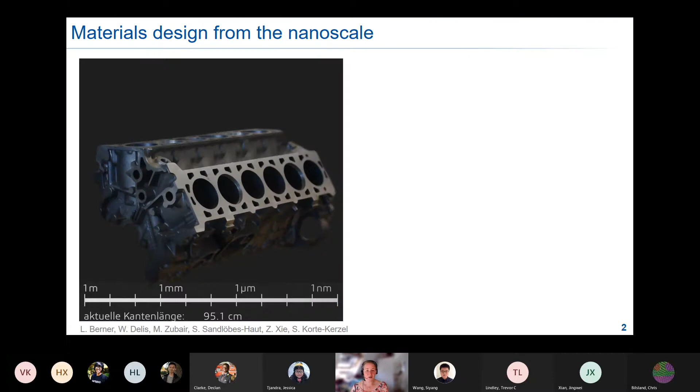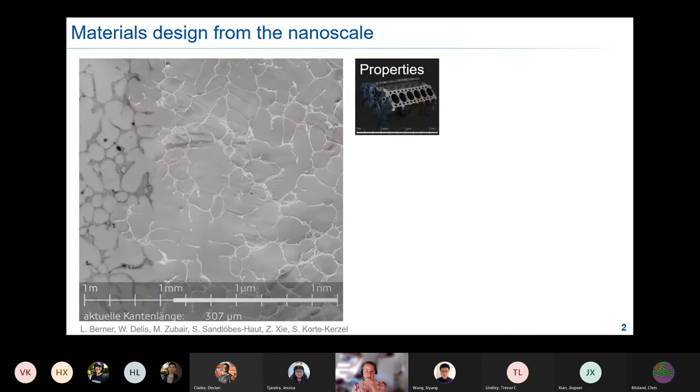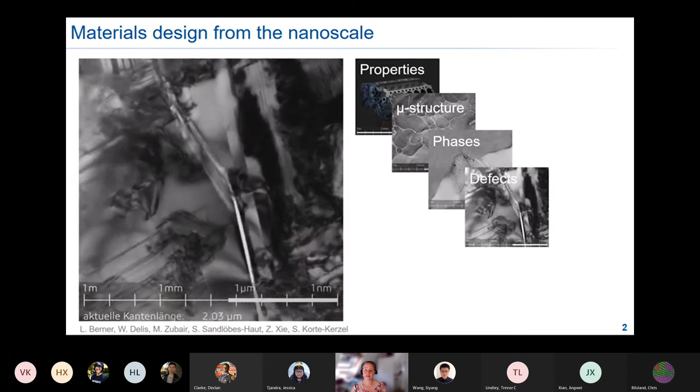Okay, so just to start us off, I think we all kind of do the same thing normally when we think about materials. We always have some property that we want to think about, and that can be at the macroscopic scale. And then as materials physicists, scientists, we normally go and say, well, that actually originates from the microstructure. We can interrogate individual phases, how they deform, and which crystal defects actually give rise to their properties, how they're affected by alloying, and we can do that all the way to the atomic scale these days.

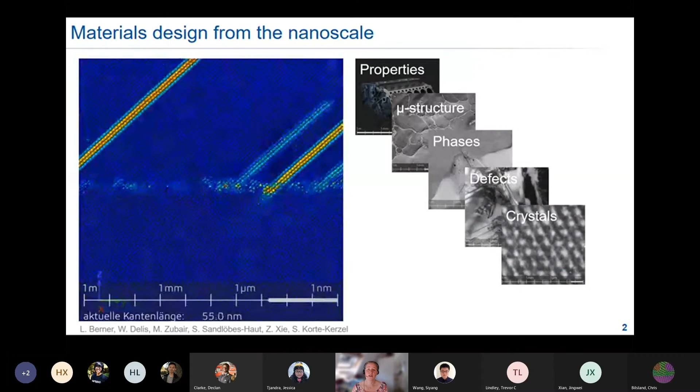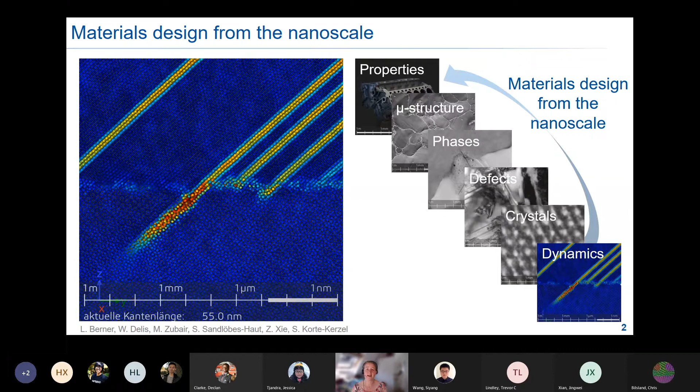We can do that in the experiment, but importantly, I think now we can also go back in scale and use the same scales to not just look at something that's maybe most of the time stationary in the microscope, but to actually look at dynamics using, for example, atomistic simulations. So what we do a lot of the time in our research is combine the scales, we try and design materials from the nanoscale, but also from the microstructural scale. And these are all the length scales I want to just dip into briefly and give you an overview of what we do there.

At the macroscopic scale or the microstructural scale, there's a problem we wanted to address: most of the time you have very heterogeneous alloys. High performance alloys are intrinsically heterogeneous, and what we always get is that we get high resolution, but then we're missing the statistics, and that's something we've tried to address using convolutional neural networks.

I'd also want to go down a little bit in scale and tell you briefly how we try starting to think about thermodynamics of lattice defects, so not just their structure, but also their thermodynamics. And I'd like to start on the smallest scale, thinking about crystal building blocks, which new materials we might actually find if we think about more complex crystals as well. So we start from the bottom, the smallest scale, and then work ourselves up. This is actually funded by the European Research Council as part of the starting grant FunBlocks.

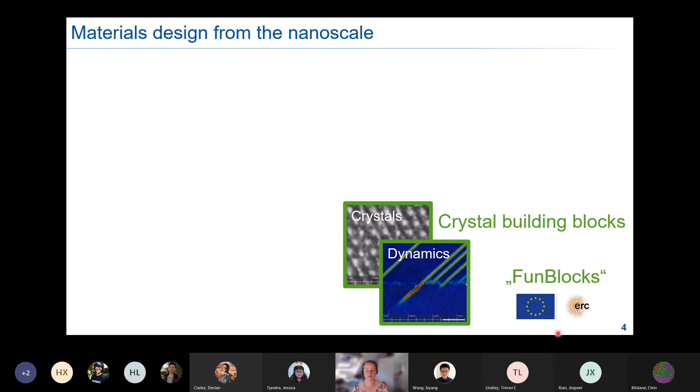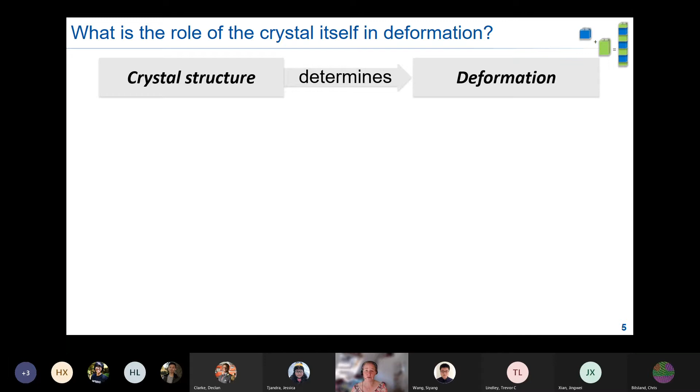So the first thing to think about, it depends, I don't know what everyone's background is, so I thought I'd start out with this. What's the role of the crystal itself in deformation? And I think it's actually the most essential role. The crystal structure determines deformation. It actually determines how, in general, a material deforms, whether it's intrinsically hard and brittle or whether it's ductile.

And just to show you briefly that it is actually the crystal structure and not so much the elastic modulus or the bonding itself: if you compare two materials with a very similar shear modulus, like silicon and copper, their intrinsic strength, so not after alloying and all of these things, differs by about 4 orders of magnitude. And the reason for that is that if a dislocation wants to move through the lattice, it has to overcome the resistance of the lattice.

And that depends actually exponentially on the distance between the slip planes over the Burgers vector, so the jump distance of a dislocation. The bonding, the shear modulus, goes in as well, of course, but it goes in linearly, so it's not as strong an effect on the absolute stress that we are measuring in a material.

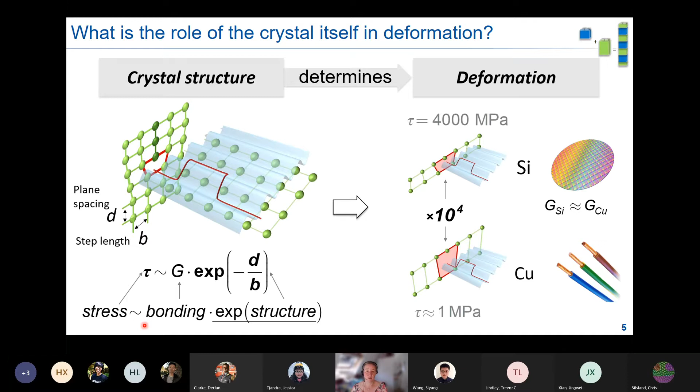So what does that mean? Once I know this, that I have the slip plane spacing and the Burgers vector, you might think it's easy, right? I want to select my material based on maybe wanting something fairly strong so I can operate it at high temperature and still have remaining strength. I just go into a database and look at this, and then I find something where I can maybe increase toughness by lowering the strength a bit.

You're looking for something that's appreciably tough, but still strong. And a lot of the materials, actually most materials, are not an aluminium alloy or a titanium alloy or something of the sort, a pure metal that's been alloyed. Most materials in a database will actually be binary, ternary, and so on crystals.

And all of these tend to form much more complex crystal structures than just an FCC or a BCC lattice, or they have larger motifs that go on these lattices. So what we want to do is we want to be able to go and look at these structures and predict what their deformation characteristic might be.

And for that, we need to understand the mechanism so that we can then predict stresses based on the crystal structure. There are difficulties, and the main one is that you have to know the slip system to do the analysis I just showed you. If you want to measure the distance between two slip planes, you have to know which plane that is, and you have to know which Burgers vector a dislocation might have. And that's something that for most intermetallics, for example, we simply don't know.

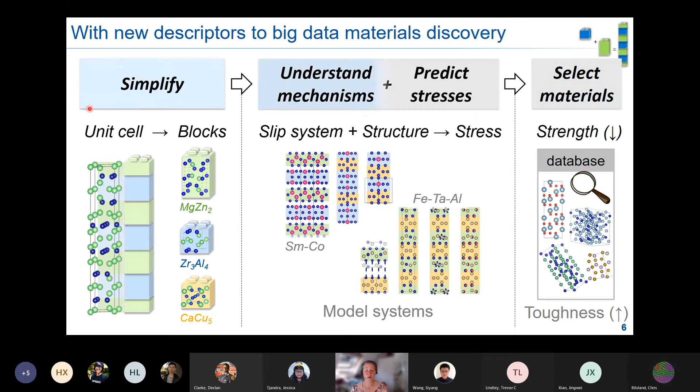So this is where we're at the moment, simplifying and understanding mechanisms. And I just want to show you a little bit of where we actually are with this.

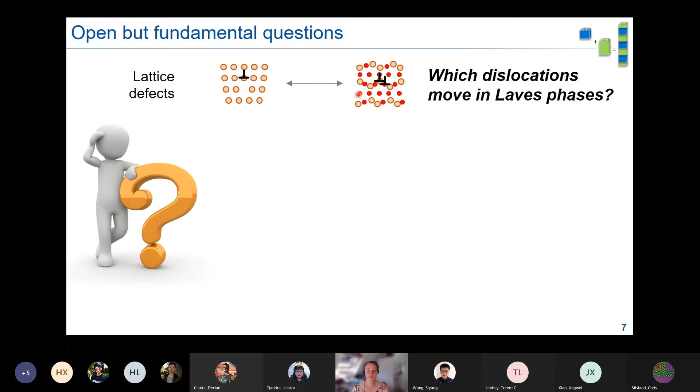So in undergraduate teaching, we draw edge dislocations, right? We draw them into a primitive cubic lattice most of the time. We also think about FCC and BCC crystals. But if we look, for example, in Laves phases, that's the crystal shown here in one projection, they're the most common intermetallic packing as a common phase, but we don't even know how to draw a dislocation in there. It's very difficult to even think about how to draw an extra half plane into this. So that's where we started out at it.

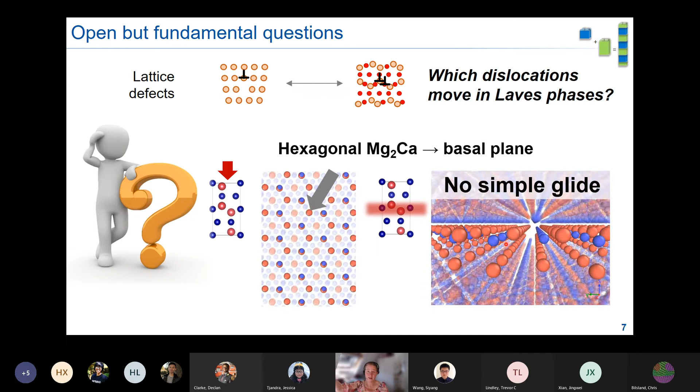There's one example, the hexagonal Laves phase, Mg2Ca. And if you look into the basal plane of this, and you can do some atomistic simulations, because for this we actually have potentials, then we can look along the plane, and we can look from the top, and we then try to shear the crystal lattice. It actually looks all right, right? You think, yeah, you shear like this, and then you get a stacking fault, and that's probably a good candidate for deformation. However, if you look from the side, then you can see that that's probably not going to happen, because essentially the slip plane has to take off and be moved upwards by a long distance.

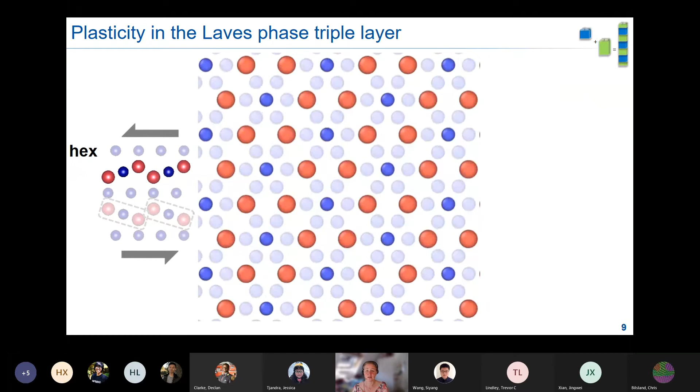And so when we actually relaxed these simulations further and looked for the minimum energy path, then what you get is this. And you saw there was some jumping about, so I'm just going to tell you this in a bit more detail. What actually happens here is that you get a shift in one direction, and then, as you saw before, atoms collide, right?

There are atoms here in this triple layer that are nearly at the same height. What happens is you get a sideways movement of one plane in this lattice, and the whole shear movement continues to arrive at a stacking fault. This whole process is called synchroshear, and that's what's happening in this simulation.

There are a few difficulties with this. All of a sudden, slip is no longer happening in one single plane. It's two adjacent planes, and the atoms also move in two different directions. So the normal kind of modeling strategies we use, like a gamma surface, kind of go out the window in terms of understanding these.

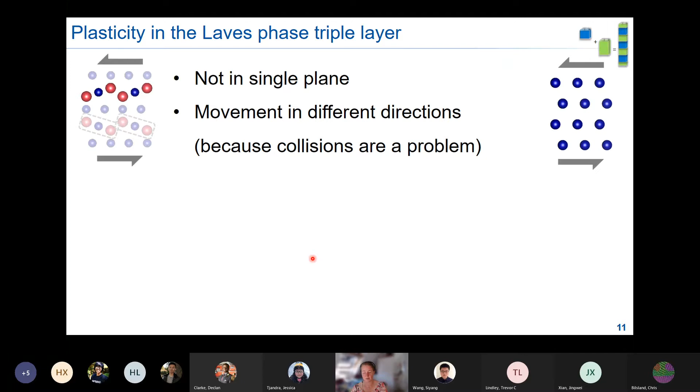I think we have a problem here that's a little bit like comparing soccer to Quidditch. All of a sudden, you're not thinking about one ball and a 2D problem. You have a 3D problem, with collisions and all sorts of atoms actually in the game.

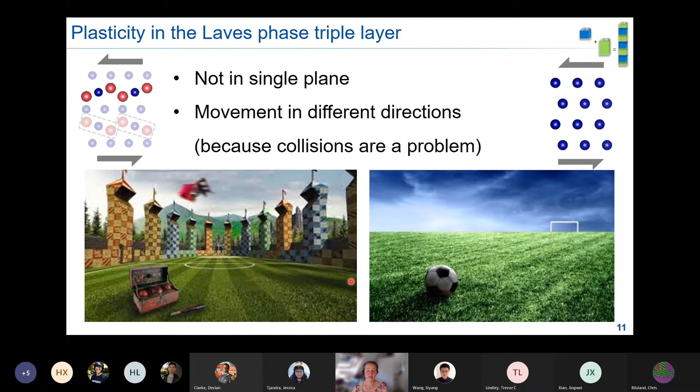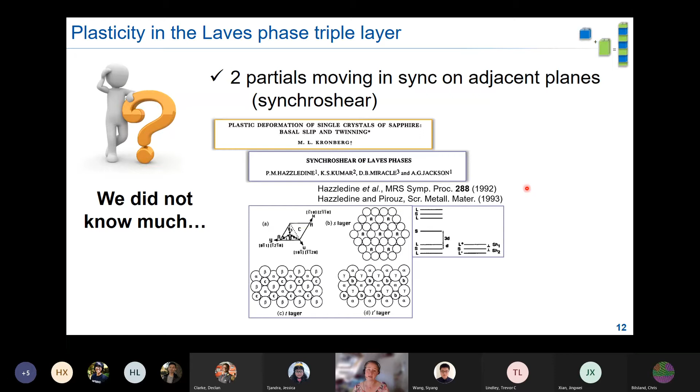We didn't come up with this process. It had been known or suggested quite a while ago. It's called synchroshear, and it was first suggested for sapphire. Then in the 90s, it was suggested this might happen in these Laves phases on the basal plane as well. The problem was that until maybe 16 years ago, nobody had actually seen it. In 2005, there was a science paper that essentially just looked at a dislocation and showed the stacking fault consistent with this mechanism.

But of course, that's a stationary defect. It wasn't even necessarily put in by deformation. What's changed over the last few years, and why I think we can now finally try to understand crystal plasticity in these phases, is that we now have experiments that can actually look at this in a quantitative manner.

We can suppress cracking in small volumes using micropillar compression, and by that we can get deformation. Importantly, we can also pull out samples that we can meaningfully put into the TEM and analyze all the way to high resolution imaging, where we can find out which dislocations were actually active in our material. So we can measure critical stresses and see which mobile defects we have.

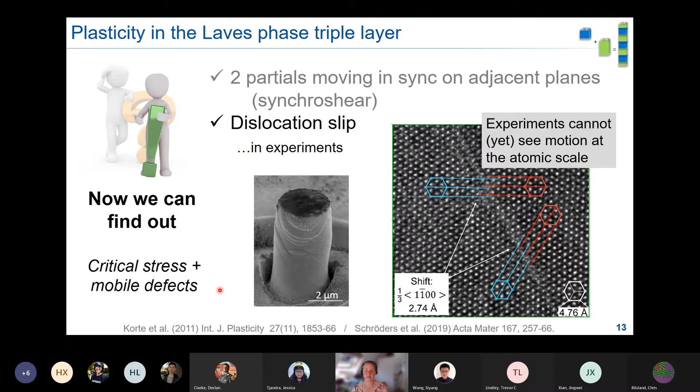The problem is experiments, at least at this kind of scale, as far as I know, can't really see motion at the atomic scale. You can't really see a dislocation moving. But we can now go to the same scale and actually do that in an atomistic simulation, looking at a nanopillar to see how dislocations move through these materials.

We can look at them from the side and do the same analysis we would do in the transmission electron microscope in high resolution TEM. That means we can find out how these dislocations might move. What's most important to me is we can find the critical configurations where we can then be more flexible, do DFT, and compare different crystal structures.

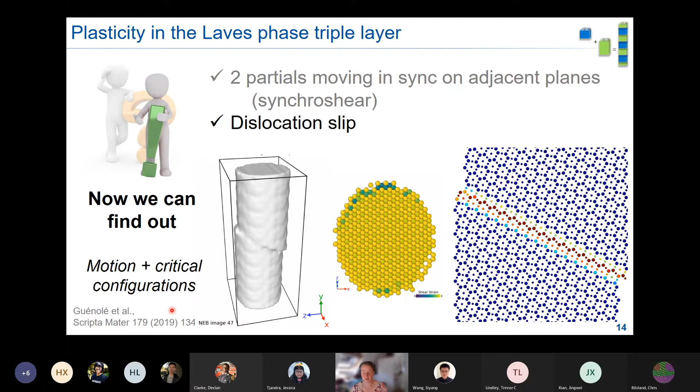One of the difficulties we had was that if we want to look at dislocations in a volume we've deformed in the computer, the normal visualization strategies we use for example in HCP or FCC crystals don't work. They're not geared for these kinds of structures.

So we spent quite a bit of time developing tools so we can highlight where a dislocation is, separate the different but closely related structures, and analyze the Burgers vectors and defects we have. If any of you are interested in this kind of problem, this has just been published, and the code is open at Zenodo and should work in Ovito, for example.

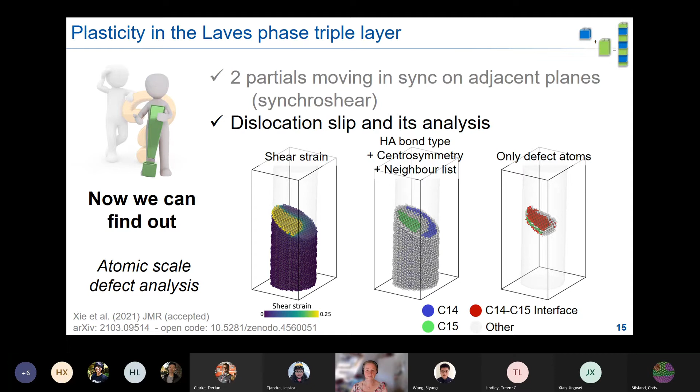Once we have this, we can do quantitative analysis on individual slip systems. We need to get faster. One of the things we're doing to see which slip systems are actually active, even though we have some candidates maybe,

is we use indentation coupled with EBSD so we can look at slip traces at the surface. They're not unique solutions, but at least they give us some statistics and guide us where to do micropillar compression or where to look at atomistic simulations, for example in non-basal mechanisms.

So for us, that's actually been quite nice the last few years. I know at Imperial you use the very same methods. We can combine experimental and computational nanomechanics, and I think getting critical stresses and defect structure from experiment and combining them with dislocation motion and energy barriers from computation is going to be really useful in understanding more about different crystal structures or alloys we want to develop.

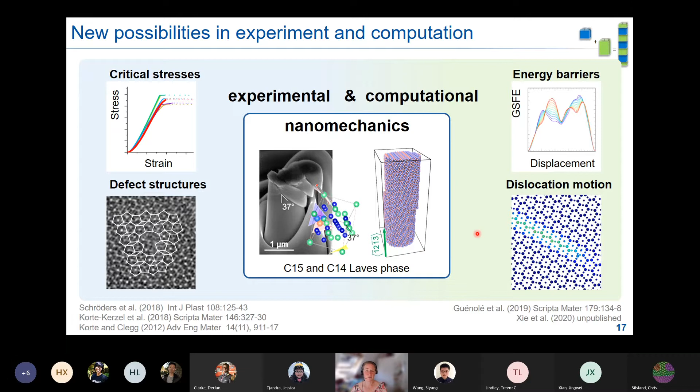So that's the kind of summary of what we're up to in this area. I believe we need new materials, for high temperature applications. We might want to combine properties, even improve damage resistance and functional materials. To do that, we need materials which combine strength, toughness, and maybe some chemical stability.

There are hundreds of thousands out there in our databases. They're all there. We know a lot of them or have predicted them. I think one thing that's missing is we can't predict the mechanical properties quite yet, or just the modulus.

So this will be our approach for the next two years, to look at these fundamental building blocks and then really try to use that knowledge to predict their properties, so we can then find from a database, and then of course alloy and improve new crystals.

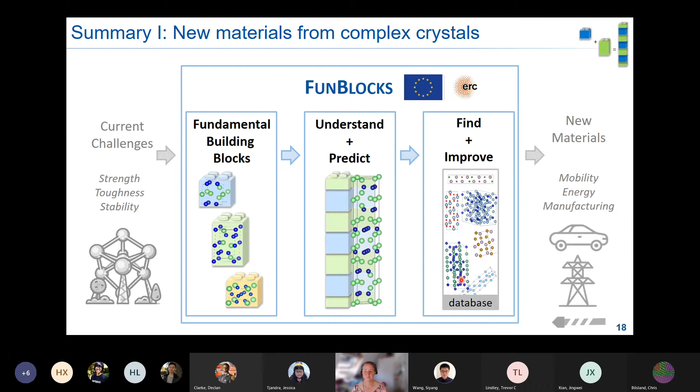Okay, so as I said, I want to give you—because I wasn't asked to speak on a specific topic—just an overview of what we're doing, and I hope that's all right with you.

So this was our work on looking at which crystals we might use for future materials. And then of course we work also on current materials that we use, metallic or intermetallic alloys, where we really want to improve the properties, and where we think normally about defect design, how we can design the defects, which alloying elements we need for this.

And there was one thing that struck us quite a while ago, is that we have two communities. We either think about thermodynamics, and those people are normally the ones who work with phase diagrams and Calphad, designing which phases we have in an alloy.

And then there are the people who look at defects, and they are mostly concerned with doing atom probe tomography on one defect, on a dislocation or grain boundary, seeing where alloying elements go, and then seeing how that correlates with the mechanical properties that we actually get.

It's a large collaborative project funded by the German Research Foundation. We have about 20 PhD students working on this now. So we are embarking on something new here.

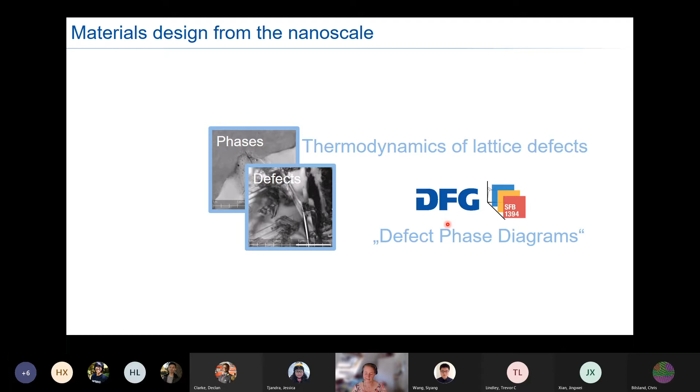I'll also just give you a brief overview of what we think. Maybe there are people in your group as well who work on similar things, and that would be great to combine forces.

So our motivation is that what we want to do is we want to really have guided, tailored materials, do materials design for structural materials like in planes, but also for the structure and mechanics of functional materials.

And we know exactly what to do for this, right? I think everyone who does undergraduate teaching in materials science, or at least attended these lectures, we tell everyone that's what you do.

You look at and understand your lattice defects like dislocations, you perform some alloying, and then you have mechanisms like Cottrell clouds or segregation, at least to defects. They might affect microstructure evolution, and you select the phases and their stability from phase diagrams.

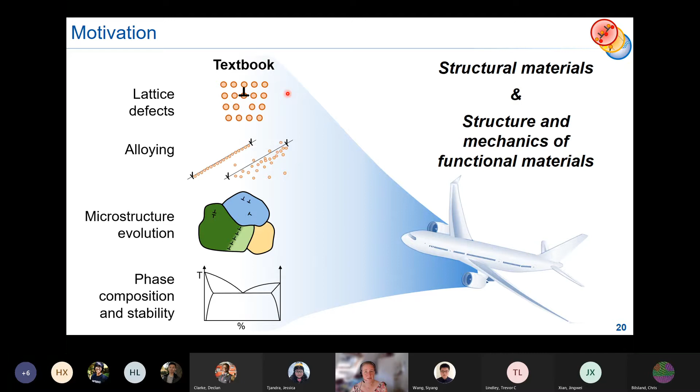That's what we do in textbooks and in teaching, and actually in research we go a lot further, and there are a lot of sites that we work on.

I've already told you that in ordered crystals, even just knowing which defects we have might be a difficulty. We also know, though, that these defects, when they are alloyed, are not just some continuous thing like a Cottrell cloud. Actually, you get chemistry and structure interacting very strongly at the defects.

We call this a defect phase, as you see. You might have heard the word complexion as well—something, a distinct structure that forms at a defect and not anywhere else. And of course, these will affect microstructural processes like grain boundary mobility.

So then you have an effect on microstructure evolution or on plasticity. And the main point that we wanted to look at is, well, actually, we should be able to do that for the defects just the same way as we do that for crystalline phases.

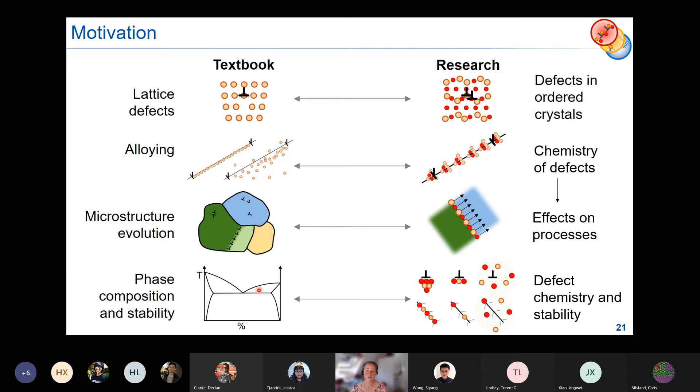So there is a disconnect between those things at the moment. We don't have physical links really between, for example, our structures at a defect and the properties, and we also don't have a coherent framework. Everyone looks at their own material, and we might understand a lot about individual materials, but we don't have a framework where we put in crystalline phases, where we put in alloying, and where we put in how the defects are affected by this.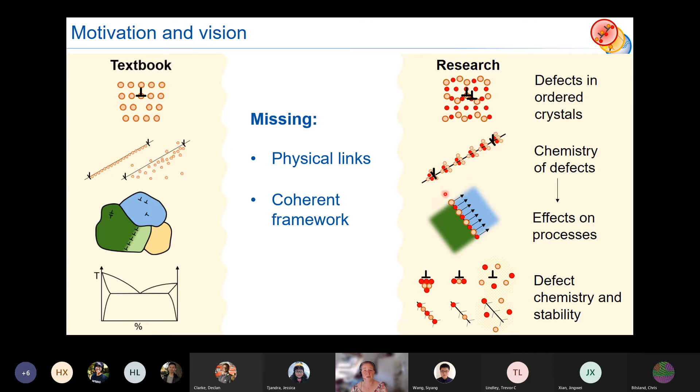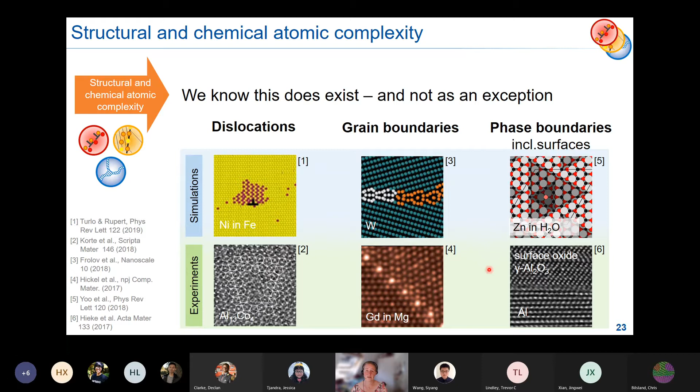So the first thing to think about, maybe a question: does that actually matter? Is that something that happens a lot of the time, or is that just something people have pulled out a few materials and published some nice papers on? Actually, we think that this kind of ordering at defects is not the exception, but it exists in most materials. People have looked at this in simulations and also in experiments - you get ordering locally at the defect, the chemistry changes and then the structure changes as well. There must be driving forces for that to happen. It can be at dislocations, it can be at grain boundaries. You can also have phase boundaries, and that will include surfaces where you find distinct structures coming up. So they also must have a thermodynamic stability that has a driving force for this to happen.

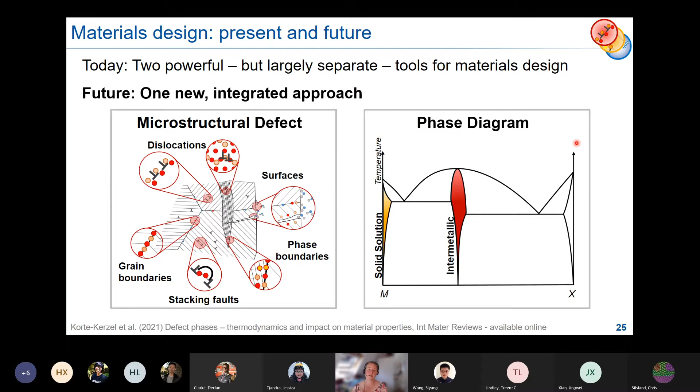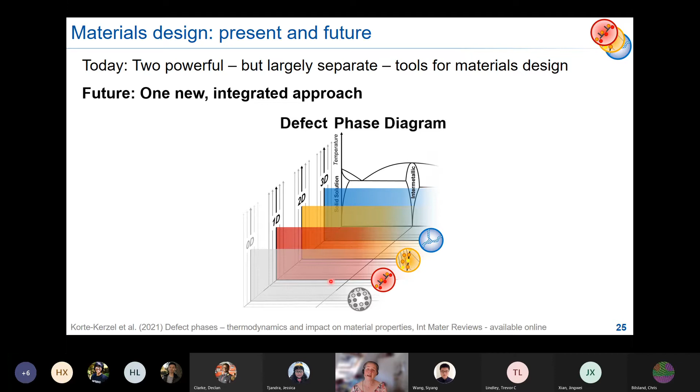So the idea is that what we should be setting out to do is to take these two powerful approaches - thinking about microstructural defects that we tailor and engineer, and the phase diagrams that we look at - and really put them together in one new and integrated approach, so that we have defect phase diagrams and not just phase diagrams. That means we have to do the whole exercise of judging stabilities, comparing different possibilities for defect structures in all dimensions. For example, we have the 3D crystal structure, we also have interfaces at 2D, 1D, we have dislocations, and we also have point defects. We'll try and put all of these into one framework.

So the first thing to get clear here is what we actually understand by a defect phase, so we can put them in something like a defect phase diagram. And we understand by this a structurally and chemically distinct atomic scale configuration at a defect that has a thermodynamic stability - something I can affect by changing the temperature, the chemistry of the alloy, and so forth.

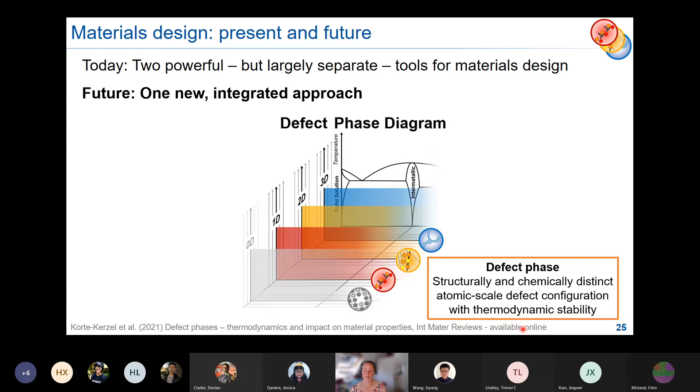How will these actually form? Well, what you will get is something that we know from all other defects. You start with newly created defects and maybe a random distribution of alloy elements depending on how you quenched. Then you have some transient states where the elements will actually segregate to the defect, form the most favorable defect structures. Then you'll probably get some relaxation and formation of defect ensembles, like you get, for example, in recovery. And then at the end of the day, you'll of course not have defects in a kind of long-term thermodynamic consideration - you would have some point defects and two separate crystal structures.

But the important thing is that we have this in our alloys, and our actual design target is somewhere here. We hardly ever go to actual equilibrium in what we use in everyday life. So what we want is - and that's important - local minima that we can stay in for a long enough time.

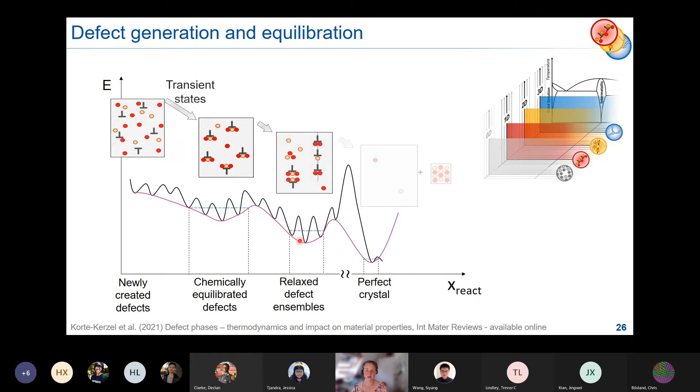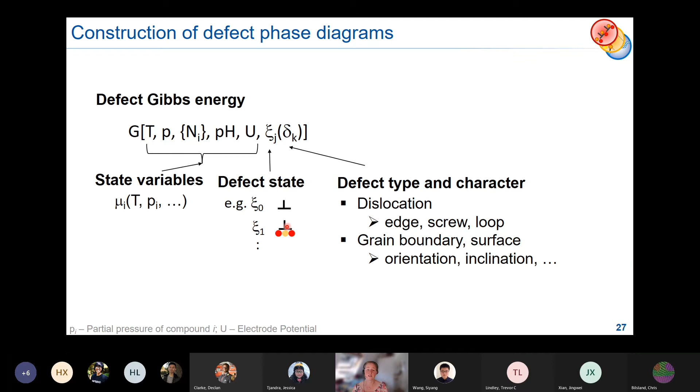So we can then, in theory, go and calculate Gibbs energies for the defects. We'll have state variables like the temperature, the pressure, the defect state. We actually need to think about all the different kinds of defects, for example, edge or screw dislocations, boundary orientation, and so forth. All of these describe the defect phase, and the conditions are essentially described by the chemical potential.

And then we need to think about actually doing this, and this is where the problem comes in. There are now a lot of variables, or a lot of different defects that we need to look at, for two axes - for example, the chemical potential of two alloying elements. So what we think you have to be doing is what you would do in different phase diagrams as well: go and look into your alloy, look at maybe having one defect structure at one point and then having a different defect phase at another point. Then we would have to keep looking at other points and look for the boundaries in our phase diagrams, just like you would do for a normal phase diagram.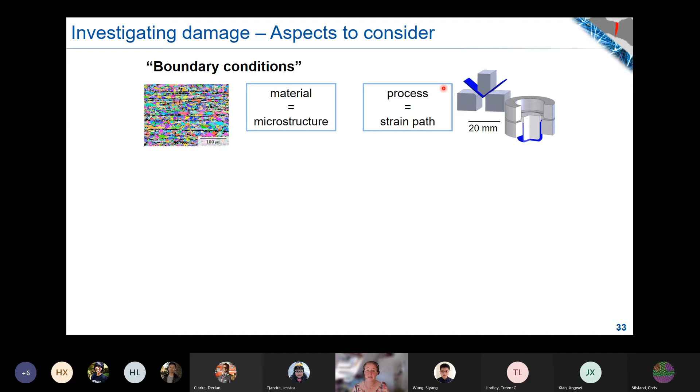The engineers actually think about the process and the strain path that a material encounters. We also think about damage, and we think about nucleation, growth, and coalescence. From the engineer's perspective, that means how far am I from failure? Which safety margins do I have to consider?

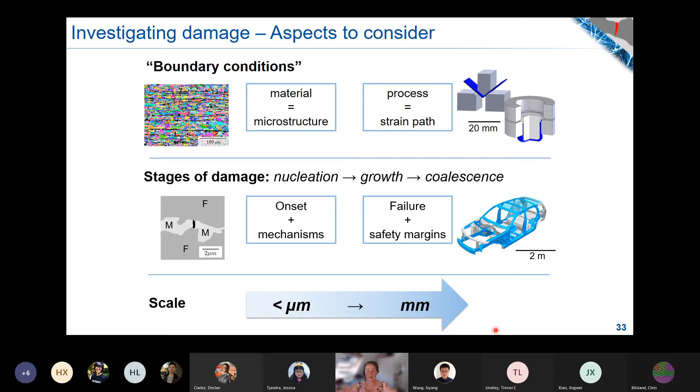For us, we're interested in the underlying mechanisms - where do I actually nucleate the first damage, and by which mechanisms do I do this? The important bit here is that I really have a scale bridging problem. Damage might nucleate at the nanoscale, but I need to cover the inhomogeneities that I have at least over the millimeter scale. That could be the thickness of a sheet, and that can also be the strain field or strain path that varies over a much larger area.

So what I want to do here is show you how we started addressing this problem. The first step was being able to combine high resolution to look at individual mechanisms and individual sites, but do this over large areas so we can look at inhomogeneity and get some statistical relevance.

What we want to analyze is the active damage mechanisms, and we want to learn which ones are dominant and how that might, for example, differ with stress state - whether I bend a sample or whether I pull on it in one direction or biaxially.

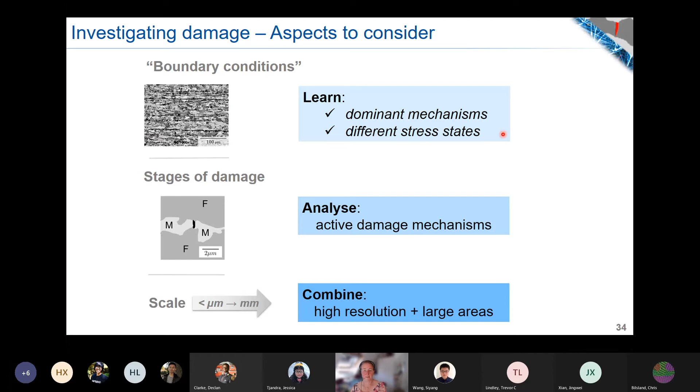The setup we use for this is we look at a tensile test sample, a few millimeters across, and then we set our microscope to take lots of individual images, and at the end of the day we stitch them together in one panoramic image where you can then, at every point, zoom in to about this level of resolution.

This is one of the reasons why, if we just look at one image like this, we fear we might not be representative enough. So we look at panoramic images that are maybe a square millimeter in size.

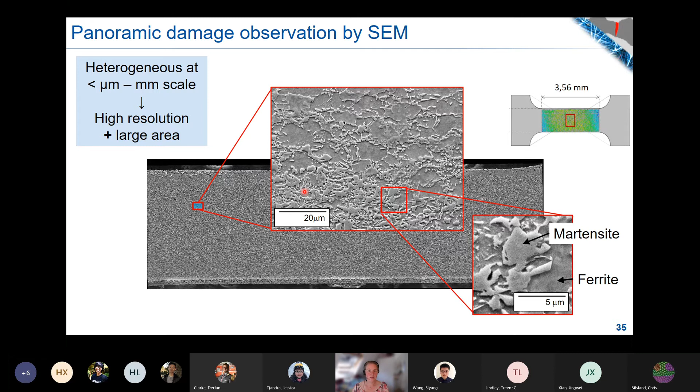What do we do then? We then end up with a lot of image data, and what we really need to do is be able to deal with that and concentrate on understanding what the material does, not have people spend all their time looking at micrographs. So we deform a sample, put the sample together into one panorama, and then we use some algorithm for void detection, as you normally would.

So for example, in case of damage - pores essentially, and cracks - we look for dark pixels that are clustered together. We can quantify those in terms of the area, for example, or individual size. But we also take all of these images and feed them through some image recognition, deep neural networks.

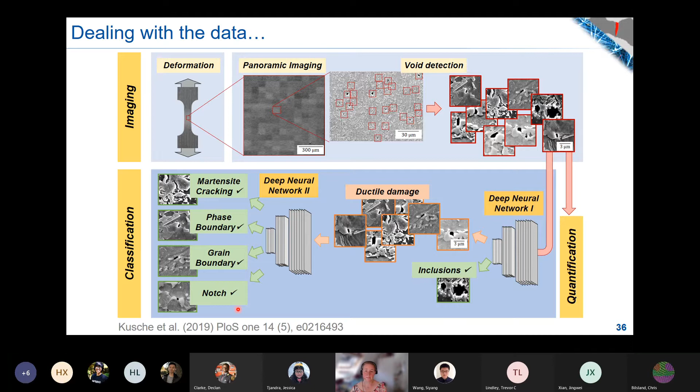There are two things we do here. One is we wanted to separate damage that stems from the material itself, for example inclusions that have nothing to do with the strain path, from ductile damage, or better, deformation induced damage. There are two neural networks: one sorts out the inclusions, which are bigger and look very different, and the second one characterizes the underlying mechanism for the images that then remain. This is really the heart of what we do, these two convolutional neural networks that we trained to do that.

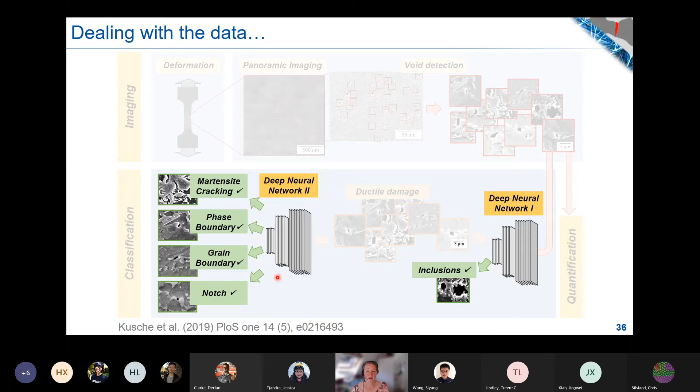So our initial problem was, is that even feasible? I mean, Facebook does that, or Google, they do this, but they have much more complex data. They also have the advantage of millions of users or people who label images for them, or big databases that they use.

And then there's also the question of what were we actually looking for? We didn't want to label a dog licking a chocolate ice cream. We just wanted to label definitions of, or classes of, different types of damage. And you look in the literature and you think, well, that's really easy, right?

You have inclusions, and we might not be interested in those unless they have decohesion, but you can have interface decohesions, you can have decohesions at grain boundaries, or you can have the brittle phase breaking. That's what happens here, and this is shown in lots of images in the literature for dual phase steels.

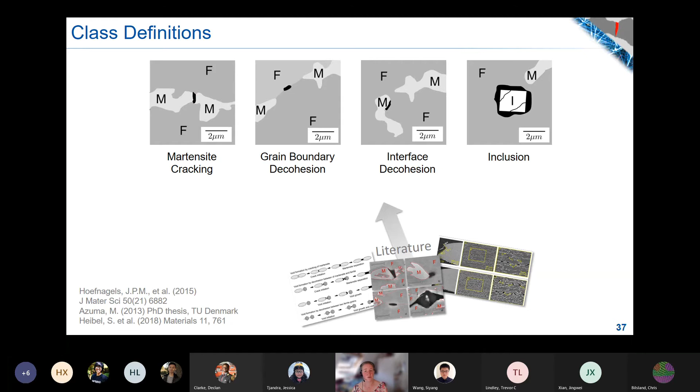So that's where we left off, and then we take our panoramic images and sort out all the little bits. There can be thousands of them in one panorama, so we have fairly big data, and then we want to look at them and classify this data.

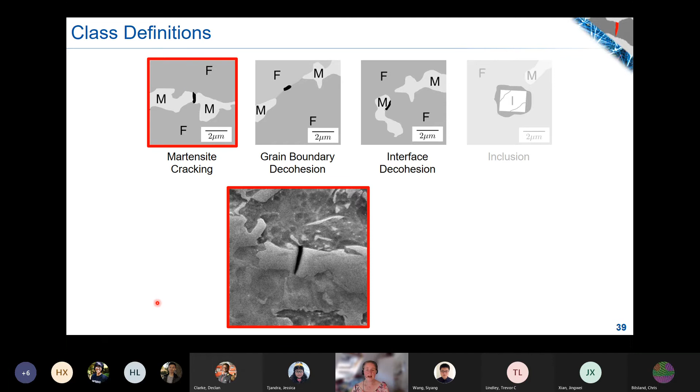And sometimes you get images like this, and that's fine, right? You look at this and say, this is a martensite island, it's clearly cracked, so this is what I get. And then you think, well, that's easy, I just continue.

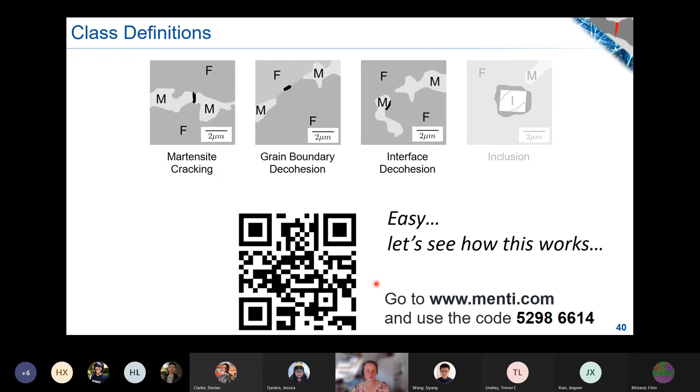You can try this yourself on Menti as well. We've started a bit late, so let me do a little spoiler here and show you what we thought. If you try this for different kinds of images, what actually happens is you also look at a damage site like this, and then maybe it's not that easy anymore, right?

Which kind of damage do we actually have here? I don't know whether any of you actually tried to do this yourselves. Oh, sorry, Microsoft Teams has blocked my browser now, so you can see what's going on if you try this. There are two images in this, I only have one here.

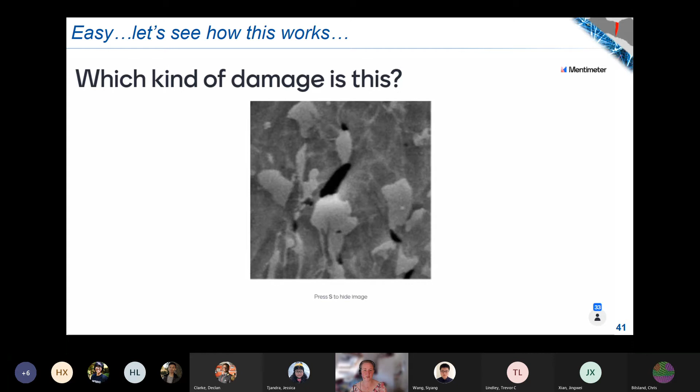If you do this with a lot of people, for example in one talk I had 33 people participate, you get this result. For this distribution, you have this one image, and a few people always decide it might be a martensite crack, there might be the interface, or a grain boundary that opens up. I also gave the option 'no idea,' which an algorithm might choose as well, and that's what you get.

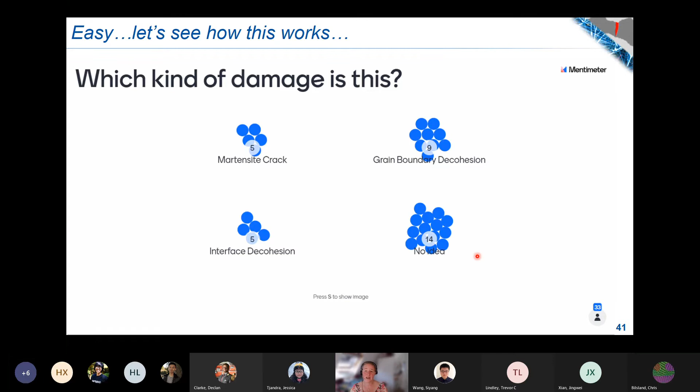So if you can't train humans, if you have so many people and so many options, and you can't actually label something or say this is the right solution, then for a neural network you have a problem, because you can't train the computer either. So we spent a lot of time having these images, giving them to different people in the lab, and seeing what classes we actually needed and how we could think about this.

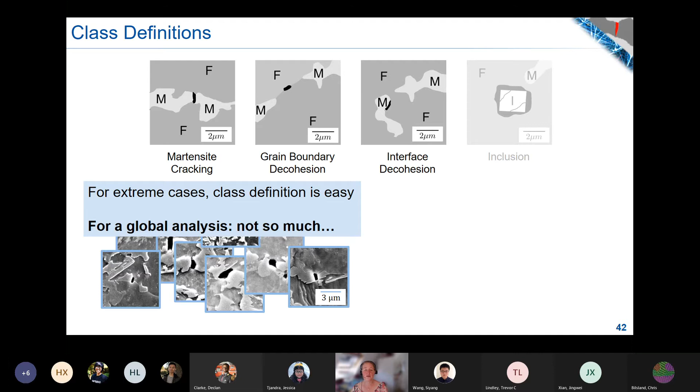So if you want to do this kind of analysis, what we actually found you have to consider is: you need to define exactly what you're looking at. We wanted to look at the underlying mechanisms. The research question, or classification task, that we ended up giving the algorithm was to look at the underlying mechanism for freshly nucleated sites.

Our brains tend to infer what we think happened, but a crack that's just been nucleated and a crack that's opened up and deformed the surrounding ferrite look very different. So you actually have to define very well what you're looking at.

You need to consider your level of resolution. For example, there will be sites where we simply can't decide based on an image, and we have to be able to classify those together and just accept that this is our resolution level.

You have to think about your data set, how complete it is, whether you have rare events that you need to consider. For this you can use data augmentation, and you also have to consider your bias—for example, whether there are sites you're trying to include but really shouldn't, or that you on purpose only look at nucleation.

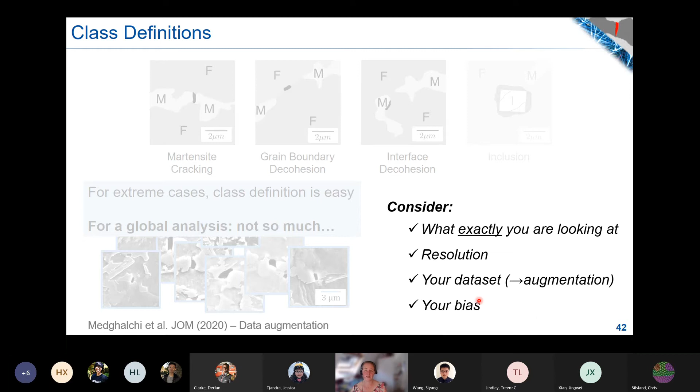So to give you an idea of what we've done with this, we looked at this industrial dual phase steel. We deformed it to different strains, and we wanted to know which mechanism actually dominates damage here.

And we get a number fraction of damage sites. With this global strain, the number of sites goes up nearly exponentially—from a few hundred to thousands of damage sites over our panoramic image.

And what was actually striking was that initially we are completely dominated by martensite cracking, and then later we get a lot of interface-dominated mechanisms.

So if you want to avoid damage altogether, you have to look for the originating low strain for the martensite, or you might have to engineer the interfaces later to avoid growth as well.

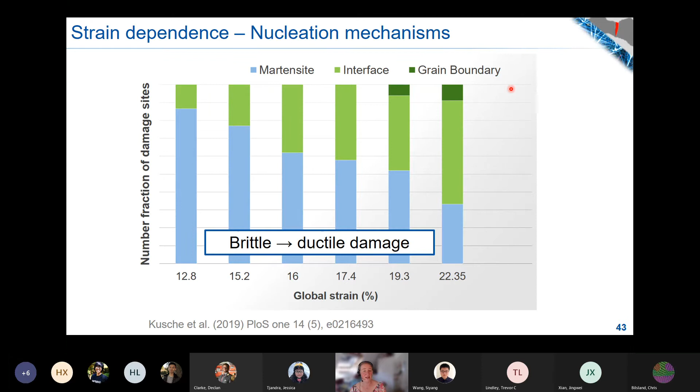We can also use this to help with in situ experiments, because if we have lots of damage sites that we track for different deformation states in the microscope, we can capture rare events like the nucleation stage and check whether they've been there in previous images. So we get a lot of these nucleation sequences rather than just a few, and we can also look at evolution for a lot of sites, as you would always do.

So clearly the stress state has changed a lot by first deforming a material and then polishing the surface, right? We knew that to start out with.

So now that the analysis is automated to a large extent, we can also go into 3D. We're starting to polish our materials and take high resolution, large area maps in each section, so that we get a rich 3D data set. We already know that this will give us new insights.

For example, the classes we tend to look at, which we just took from the literature and what we normally do, might not be all that meaningful. It's not that surprising, but it's nice to have confirmation.

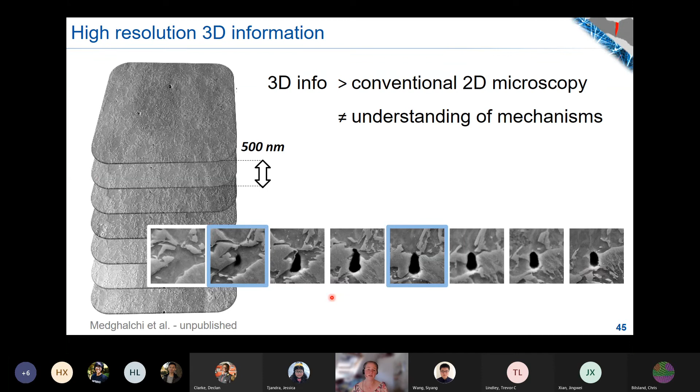So that's something we really want to dig into now, so that we can have a large area and fairly high resolution, at least in 2 dimensions, and combine this with 3-dimensional information.

So to put this together, what we've been trying to do with this approach is really combine the local scale of initiation, and also growth and coalescence of damage sites depending on the local microstructure, comparing that with a global view in terms of how, for example, nucleation of damage depends on something like the plastic strain.

We've looked at that also in terms of growth. We've changed triaxiality, looking at different kinds of notch samples. They're also done with biaxial tests.

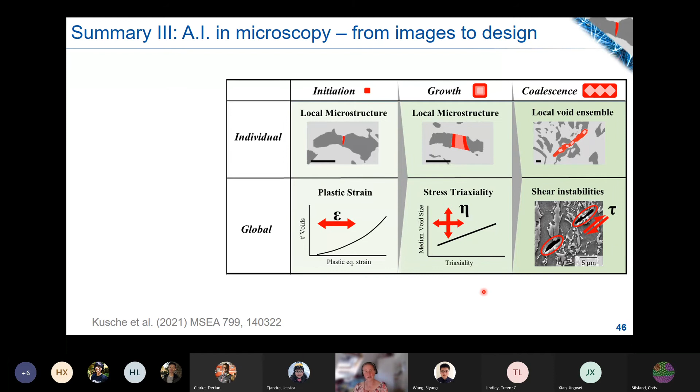You can do all of these with essentially the same trained networks, all the way up to coalescence, because the maps are big, looking at how the different damage sites will coalesce into instabilities that lead to failure. I think it's quite nice because we can now have this method, and it gives us a data set that we're starting to combine with the people doing the modeling.

So we can actually give them more information about the kind of models that we need, more statistics of what, for example, a pore population that they put in should look like from a statistical perspective, and which mechanisms we would expect to take place in the material.

One main insight we found was that all the classical damage models we have were actually derived on model materials which had one metallic phase and were fairly isotropic. What we found was that, in a material where we, for example, combine ferrite and martensite, that locally doesn't hold true. Locally, you're dominated by the local stress state. That's why you need the 3D information as well.

But overall, if you look at many damage sites, you find what you expect in a global image. So these models still seem to hold, so we can use them in process simulation. For example, plastic strain is what actually drives nucleation of damage, and the triaxiality, the overlaid hydrostatic component, is what seems to drive growth of all of them.

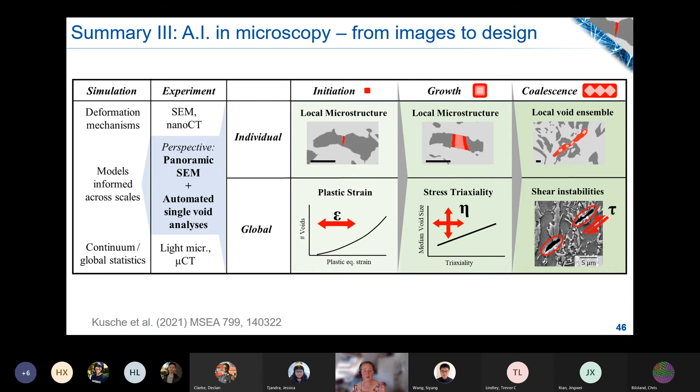Okay, so with that, I'll leave you with a short summary just to remind you what I actually talked about. There are 3 bits to this talk.

I told you about our approaches to understanding plasticity, mainly in intermetallics at the moment, with the aim of then predicting how they deform, and then also maybe finding new phases in databases by having descriptors that relate unit cell structure with mechanical properties. On a slightly larger scale, looking at how to design defects in different phases using the approaches that we get from phase diagrams and the thermodynamics.

So thinking about defect phases rather than just an ideal lattice defect. And lastly, looking at co-deformation: how, when we combine different phases, different materials, we can look at the mechanisms that define co-deformation in an efficient way, and then, of course, at the end of the day, also find the best processes or the best microstructures.

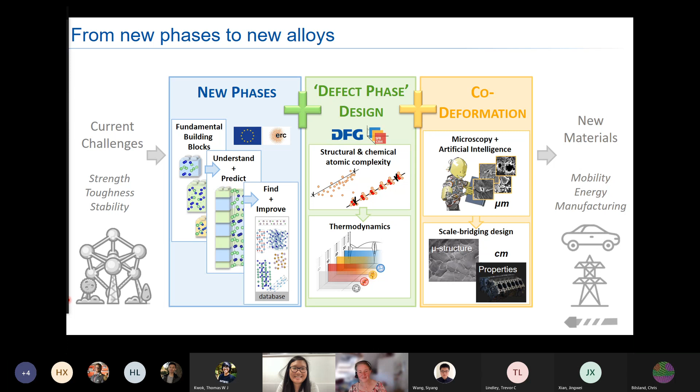Are there any other questions? No, I think thank you so much, Sandra, for giving such a wonderful talk. I'm sure it's interesting and useful for everyone else in this call as well. But yeah, looking forward for more of your work, and have a good day. Thank you so much, you too. Thank you very much for the questions and inviting me as well, have a nice sunny day. You too, bye-bye, thank you very much, bye.